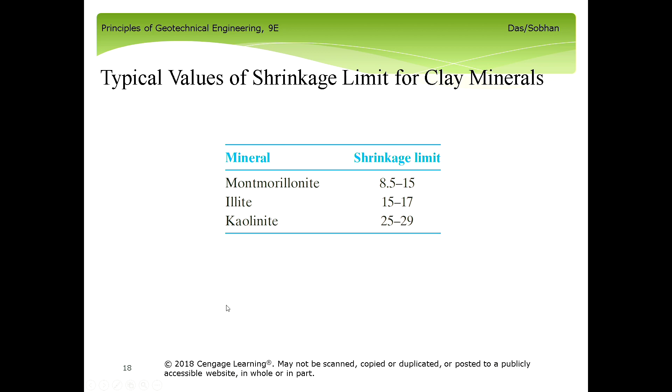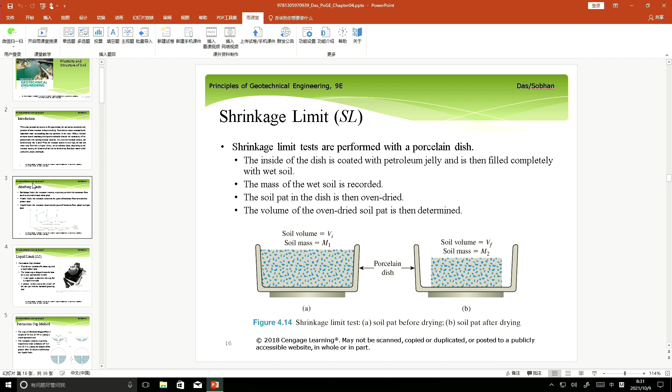So in the last class, we actually introduced the main thing in chapter 4, and we talked about the liquid limit. Actually, in chapter 4, we have 3 limits to introduce and how to determine those limits in the laboratory: plastic limit, liquid limit, and shrinkage limit.

So from shrinkage limit to liquid limit, the water content actually increases, right? It's getting higher and higher. So soil goes from solid to semi-solid, then plastic, and then liquid. So as the water content increases, the phase changes.

So at an exact water content, for example, from solid to semi-solid, we call this water content the shrinkage limit. From semi-solid to plastic, we call this water content the plastic limit. And the same for the liquid limit. So this is the definition for these 3 limits.

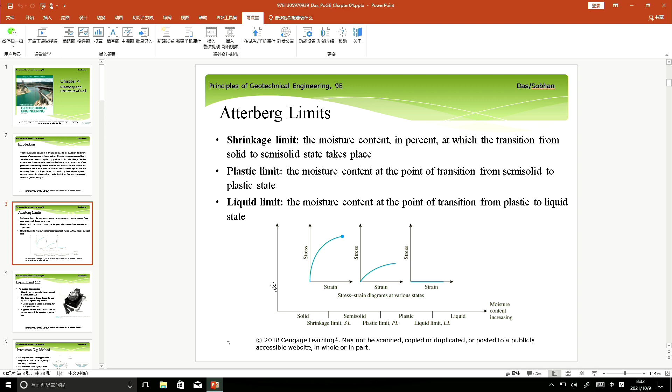And then we talked about some laboratory methods, how to get the liquid limit, plastic limit, and shrinkage limit. For the liquid limit, we introduced 2 methods in the laboratory. One is the percussion cup method. A percussion cup is a device where you place soil in the cup and then make a groove in the middle.

The groove has an exact depth and width because we have such a tool, a grooving tool, to make the groove. So as long as you handle this device and run it, as the groove starts closing, the water content is recorded at a handling of 25 times. Then the water content at that point is the liquid limit. This is the percussion cup method.

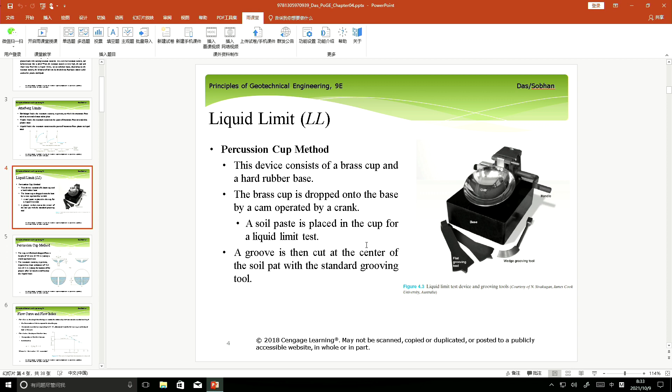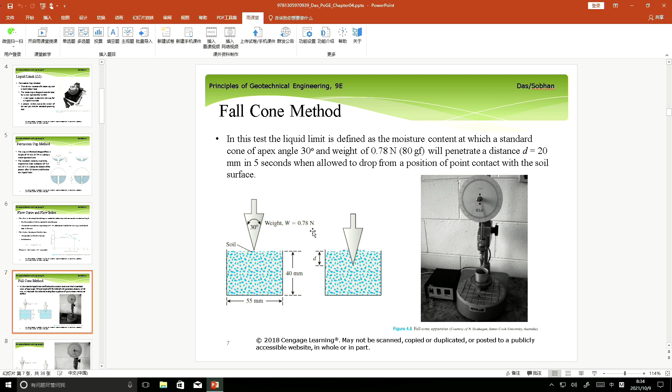But the one we use most is the fall cone method. With the fall cone method, we can actually get both the liquid limit and plastic limit at the same time. With a single set of tests, you can get both liquid limit and plastic limit. This is why the fall cone method is widely used all over the world to estimate the plasticity of soil.

This is the fall cone method. So for both laboratory test methods, what you need to learn is: if the problem gives you just a number, for example the moisture content and penetration for the fall cone method, you can analyze where the liquid limit is. And as long as it gives you the plastic limit, you can calculate the plastic index, right?

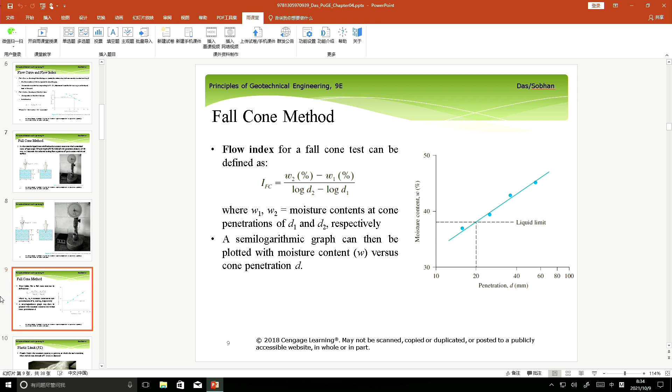So then what is the plastic index? The plastic index is the difference between the liquid limit and the plastic limit, right? As long as you know these two, you get the plastic index. The plastic index is a very important soil parameter to classify fine-grained soil, because for coarse soil, gravel, or sand, we don't use the plastic index for those soils—it's only a parameter for fine-grained soil, for clay, right?

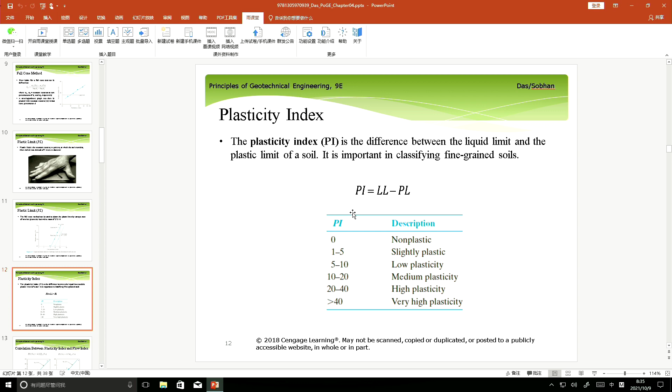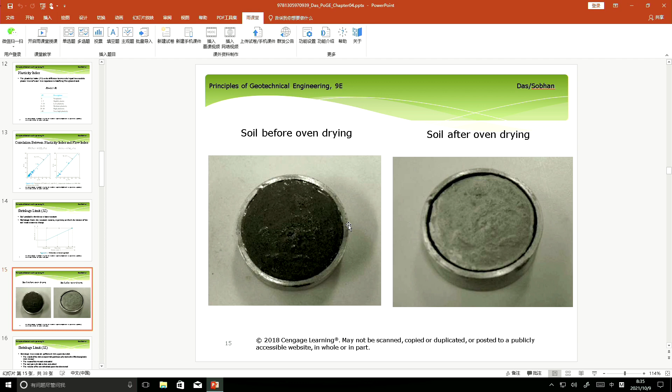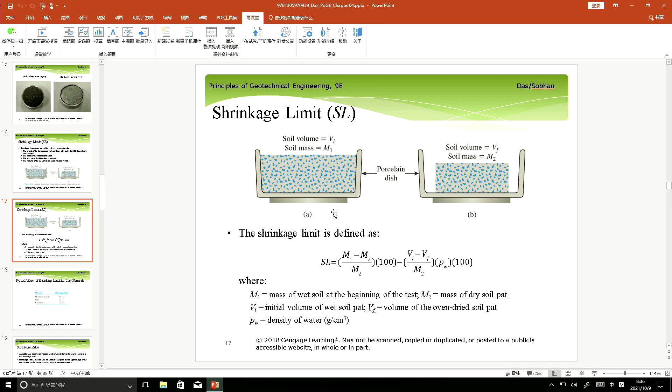And then we talked about the shrinkage limit. We said that shrinkage limit can be estimated with a laboratory test—just dry the soil and measure the volume and mass before and after drying. But we said using this equation is actually difficult because the volume change is hard to estimate. So you just need to know what the shrinkage limit is; we don't have to calculate it. It's not as commonly used as liquid limit and plastic limit.

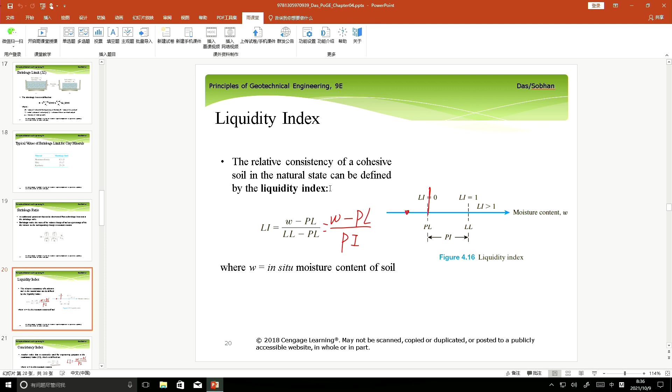And we introduced the liquidity index. Liquidity index is calculated using this equation. The bottom number here is actually the plasticity index, and the top one tells you the difference between the current water content and plastic limit.

This is liquidity index. It actually tells how wet the soil is now. It tells you the relative position to the plastic limit and liquid limit for the soil now. For example, if the water content is in here, the liquidity index is between 0 to 1, because water content now is higher than plastic limit but lower than liquid limit. So this value is positive, but smaller than this value, so the ratio here is from 0 to 1.

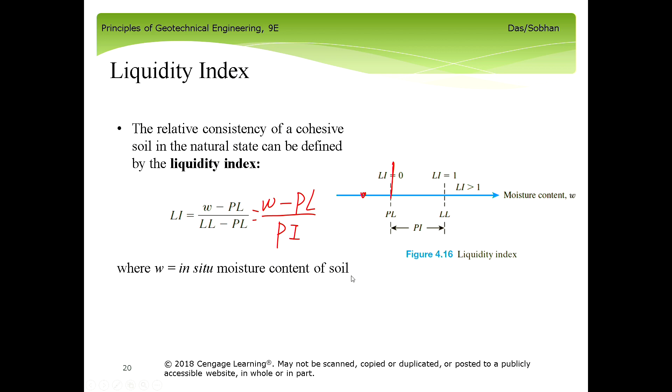But if the water content is higher than liquid limit, the liquidity index is higher than 1, because the top number, water content, is higher than liquid limit, so this part is higher than this part, so the ratio is higher than 1. Actually, the liquidity index tells you how wet the soil is now compared to the plastic limit and liquid limit. As well as the consistency index, it is actually the same with that liquidity index.

And then we stopped here in last class. Then let's talk about activity.

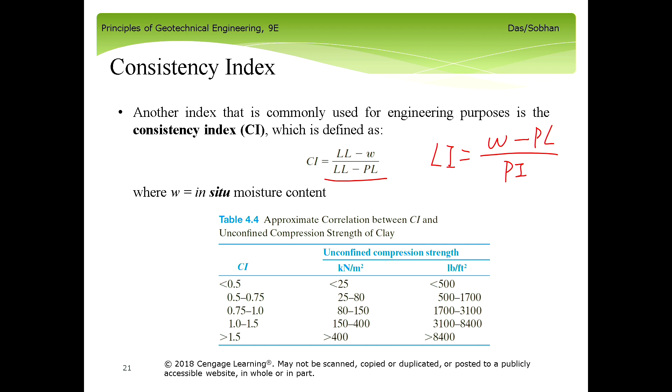Activity is not quite easy to understand, and I think it is a little bit early for you to understand the activity, or something like a charge on the clay particle. So you just need to know those things, that's all. If you work for a master's degree or PhD, then you may need to understand what is the activity of soil, what is the structure—very deep stuff, very microstructural stuff.

So for activity, we use A to represent it. Activity is used as an index for identifying the swelling potential of clay soil. Actually, it's not only swelling potential, but something else.

Activity, how to say, it is very hard to say. It's related to a lot of things. Those things, it's not like liquid limit or plastic limit where we can use a parameter to represent it. I just want to say it is not only related to swelling, but other properties, microstructure properties of soil.

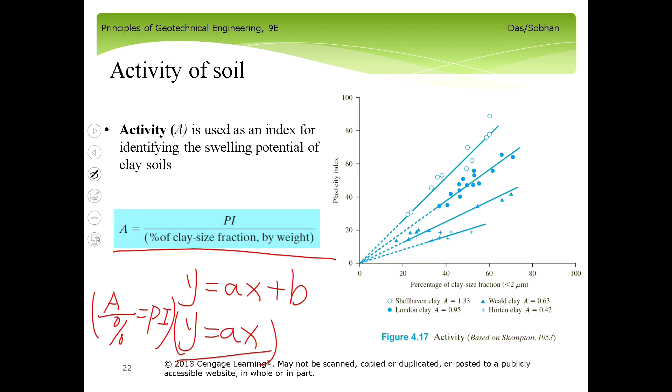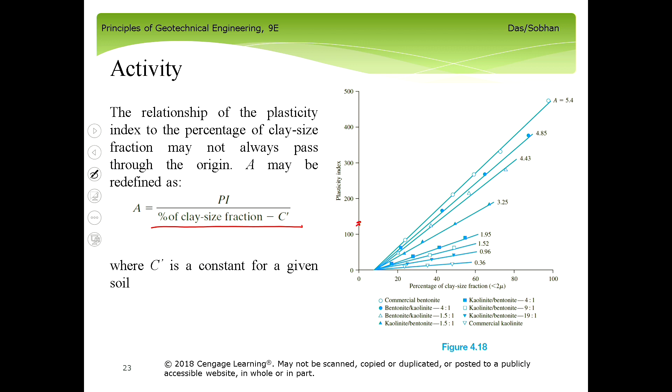This is not quite important here. Let's say the activity is not a constant value for a given soil. For example, the relationship of the plasticity index and the percentage of clay fraction. We said it is a ratio, right? But it is not a constant ratio, it changes.

For clay size fraction greater than 40%, the straight line passes through the origin. So the plastic index past zero, this ratio for this line is a constant value. But as long as the percentage of clay size fraction is less than 40%, it changes to another ratio. So it is not always constant; if the clay percentage increases, it may also change.

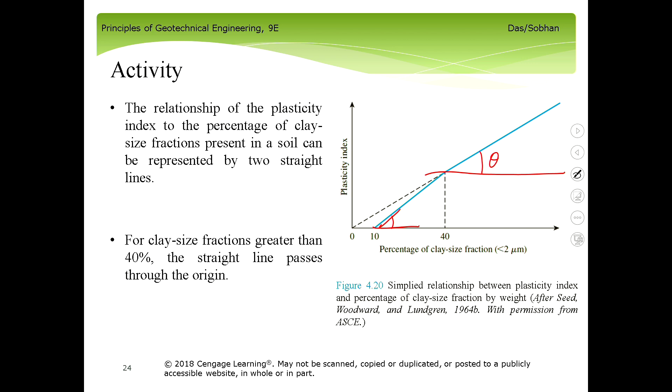Let's see. This is just to introduce the activity of clay soil. We don't always use it, but...

The plasticity chart is a very useful chart. It tells you how to classify a clay soil with liquid limit and plastic index very quickly, so we usually use this plasticity chart. It plots the liquid limit against the plasticity index of various soils. The information provided is useful for studying the correlation of these parameters and for soil identification. In most cases, we use this to do soil identification.

So what's this chart? In this chart we have 4 lines. The first line is the U line. The bottom line here is the A line. And we have vertical lines for liquid limit at 30 and liquid limit at 50. These 4 lines separate the chart into 6 parts, and these 6 parts represent different soils.

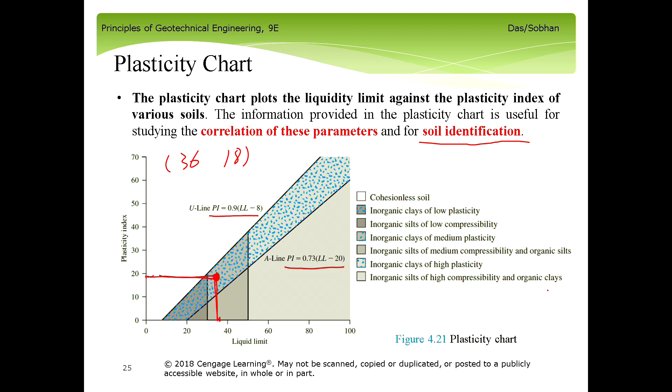If we go back to the chart here, this soil is actually an inorganic silt of high compressibility, or organic clay. For this kind of clay, it is very organic. Organic means the clay fraction is very high in most cases.

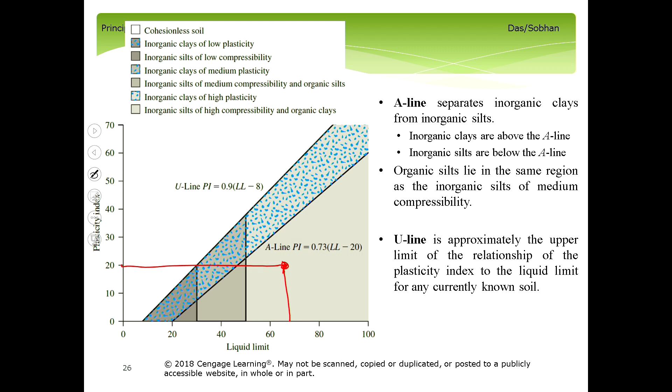If you fix the position of the soil at point A, then project the A line and U line downward to meet at point B. So first project the A line and U line downward and let them meet at this point, then connect point A and point B. It must have a crossing point at the x-axis, around point C.

The water content at point C gives you the shrinkage limit of this soil. So now you know the plastic limit, liquid limit, and shrinkage limit, the three limits of the soil. This is how to use the plasticity chart to estimate the shrinkage limit. It is a very rough way, because the shrinkage limit is difficult to estimate in the laboratory.

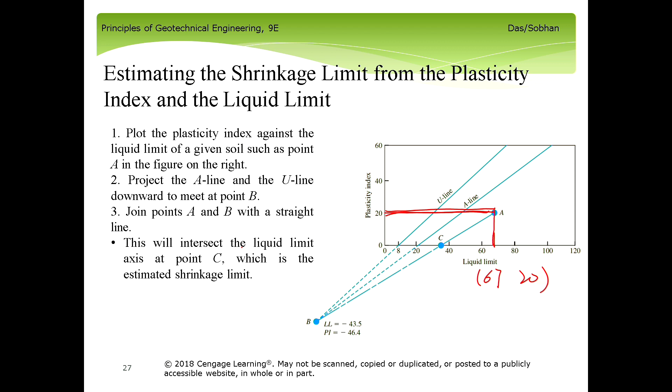And this is something about the activity of the soil, and some description introducing the plasticity chart. And then let's see soil structure.

Soil structure is actually very important to soil, because the behavior of the soil, or let's say the mechanical properties of the soil, is actually a reflection of soil microstructure, right?

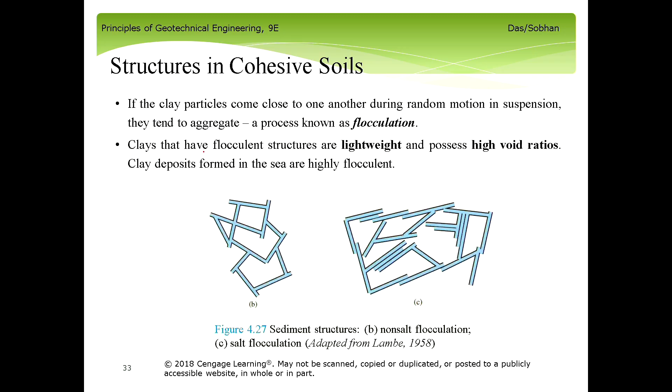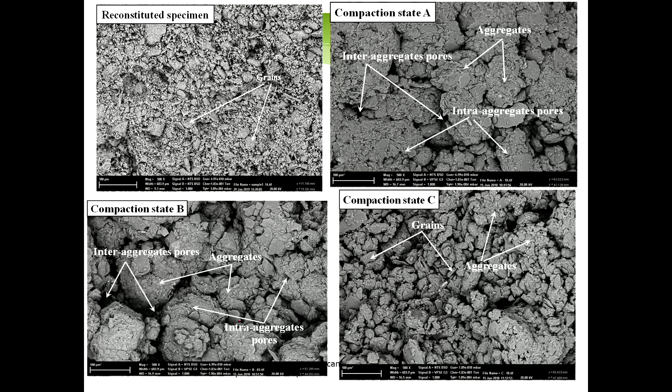So these are called microstructure. How the particles arrange with each other, how big the aggregates are, and whether the contact is point contact or face contact - those are all called microstructure of the soil, and they influence the macro property of the soil.

Let's see some structures. Soil structure is a geometric arrangement of soil particles with respect to one another. The factors that affect soil structure are: shape of the particle, size of the particle, mineralogical composition of soil particles, and nature and composition of soil water.

So most factors come from the particles, right? Particle shape, particle size. For example, does it have sharp ends, or is the shape just round? Or the size - for example, clay has a quite small particle size, but sand has a large particle size. So the arrangement between sand particles and clay particles will form different soil structures.

Mineralogical composition of soil particles - this means that among the three main minerals, montmorillonite, illite, and kaolinite, if montmorillonite is in a higher percentage than kaolinite, then the soil shows a larger swelling property. So mineral composition is also very important in influencing soil structure.

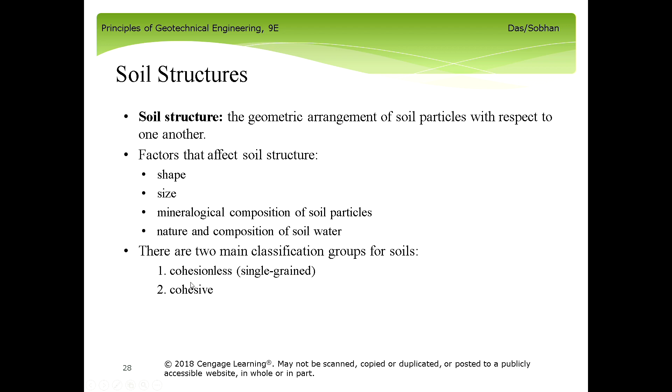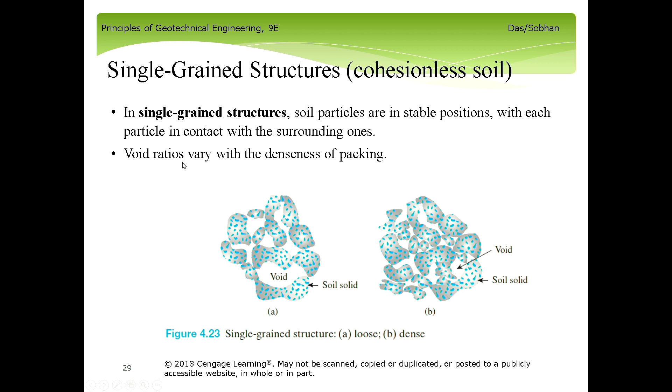The first is a single-grained structure. In most cases you can find this soil structure in cohesionless soil, for example, in sand. In a single-grained structure, soil particles are in a stable position, with each particle in contact with surrounding particles. So this is a single-grained structure for cohesionless soil, like sand, where particles are distributed like this.

But the void ratio for a single-grained structure of soil varies with the density of packing. For example, the void ratio for one distribution of soil particles is different from another distribution. This depends on the orientation of the particles, how they arrange.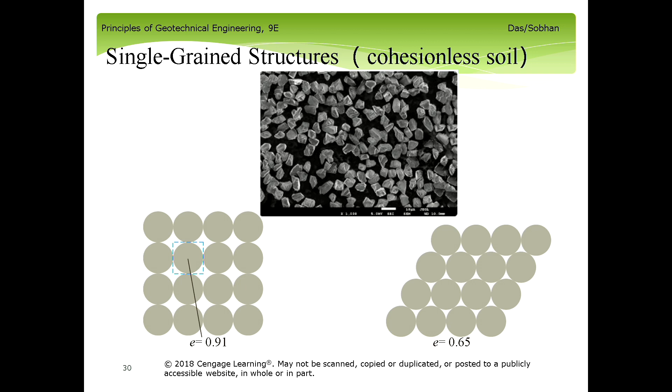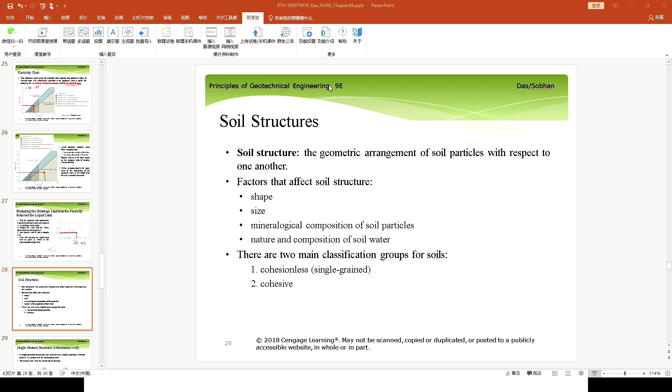And such a structure can actually carry a load. For soil with this structure, it has a higher yielding pressure - you need to apply a higher load before the soil structure may collapse. So it's said that under a heavy load, or when subject to shock loading, the structure breaks down, resulting in a large amount of settlement. So this is the honeycomb structure.